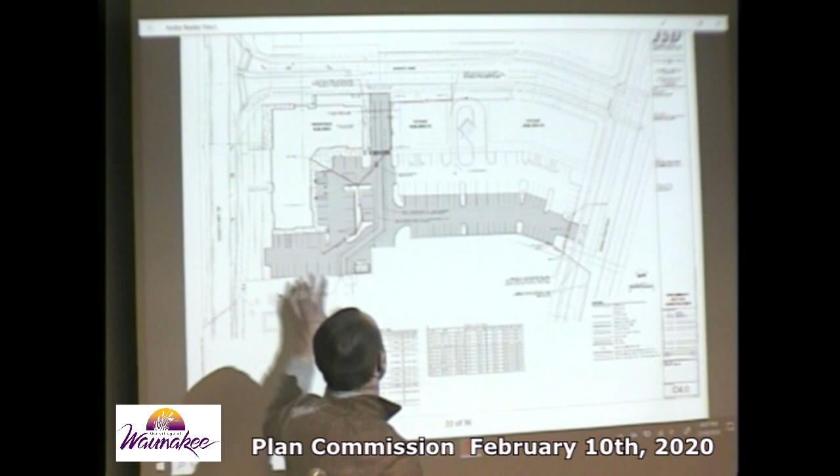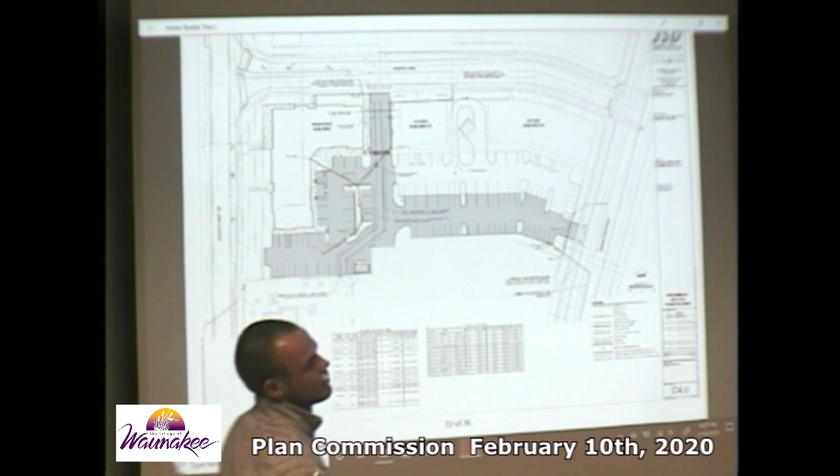Sure, on this parking area, everything is captured in this inlet, routed through, up, over, and out to Sarah Lane. The watershed itself, much of this southern parking lot, is actually projected to head southeast to our regional basin, where this parking lot is going. What we're doing here is trading off a little bit of that area, so this will head northeast, and we're picking up this area to head southeast. So there will be a trade-off here in the future, which was detailed in our stormwater management plan.

So what about the stormwater on those residential lots? Will that flow north or will it flow south? Where does it do it now? Where is it currently, what direction does it flow? I believe we're heading to the southeast with those lots, but I'd have to pull up a larger grading plan and look at that.

Okay, I think maybe you could answer that offline or later in the meeting. Sure. Okay.

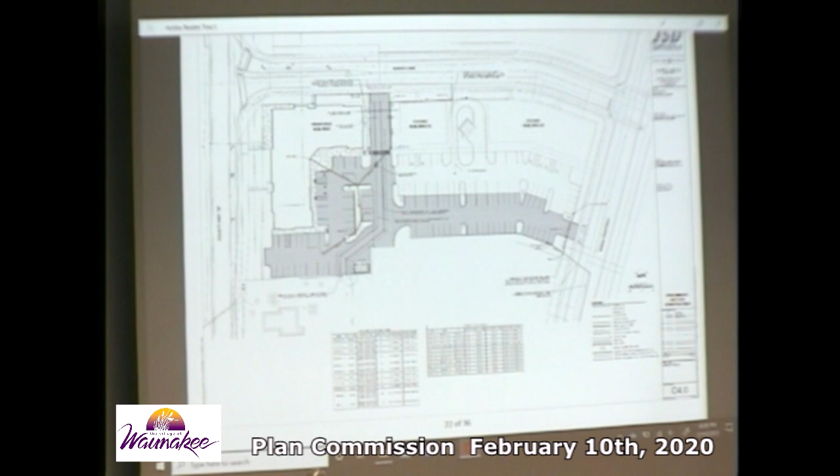My understanding, Josh Wilcox with GBA, we're the architects on the project. I don't know if everybody in their packet has the elevations or the renderings. I don't believe it's going to be part of this, so we have the option to either hand out some hard copies, or I don't know if we're permitted to put the elevations on the screen in terms of what the actual process here is.

She might, do you have a flash drive? Yes, we do, I have them previously, possibly. If you get us a flash drive, we can put them up.

There we go. All right, so right now we're looking at building 1, and that is the only building that we have developed elevations and a design for.

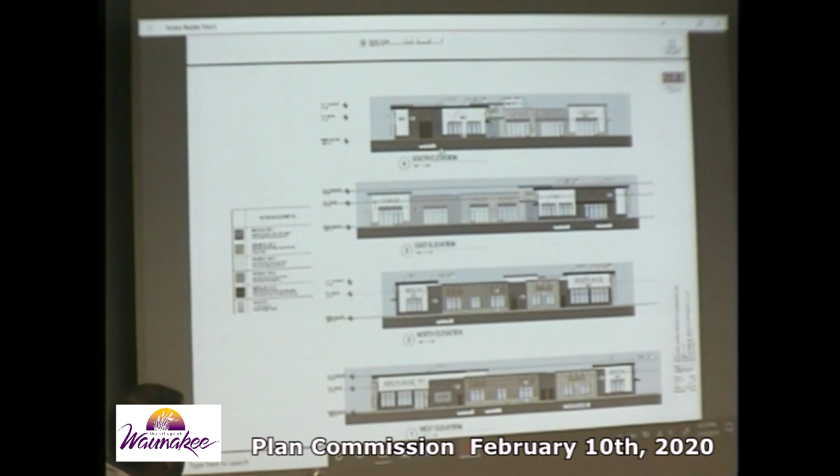Overall, the theme here is to take these buildings and pull them up to the corner of the lots to create a little bit more of an urban edge. Between the setbacks that are required and the different utility easements, we could only go so far. But by pulling all of the buildings up, not just building A, we create more of an urban edge, activate that corner, create a little bit more excitement there, and also bring the parking internal.

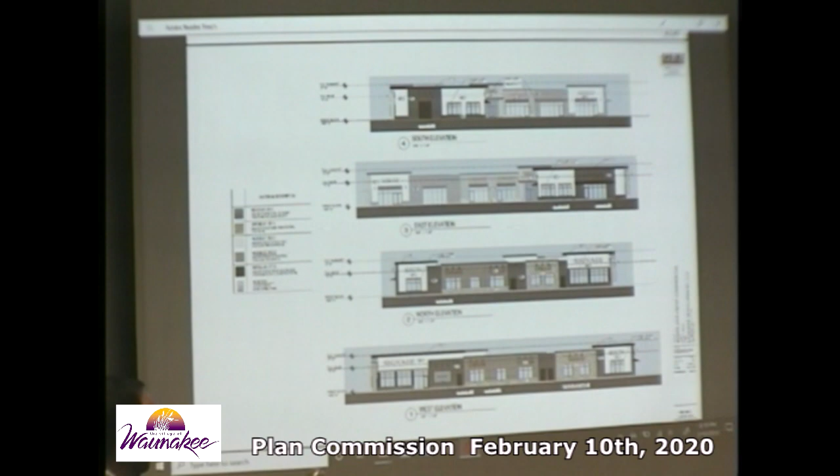So when you're going by on Q or Sarah, coming from Hy-Vee, you're going to be looking at more activated storefronts and less at a parking lot. That's the overall concept, and that's where we started with building 1 with that L-shaped design. Buildings B and C will evolve, but that concept is there, again creating that activated storefront looking out.

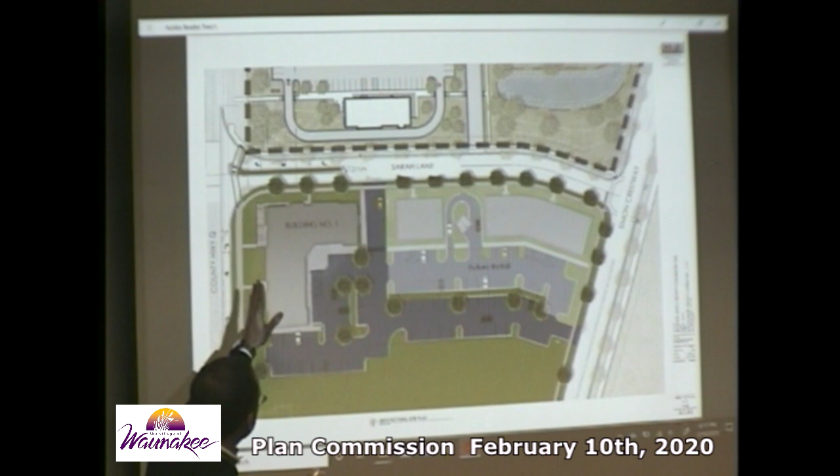While the actual pedestrian entrances will be on the inside of the building, the facade itself has been activated on all four sides with high-quality materials, massing, and different roof lines throughout the facade to ground the materials in there.

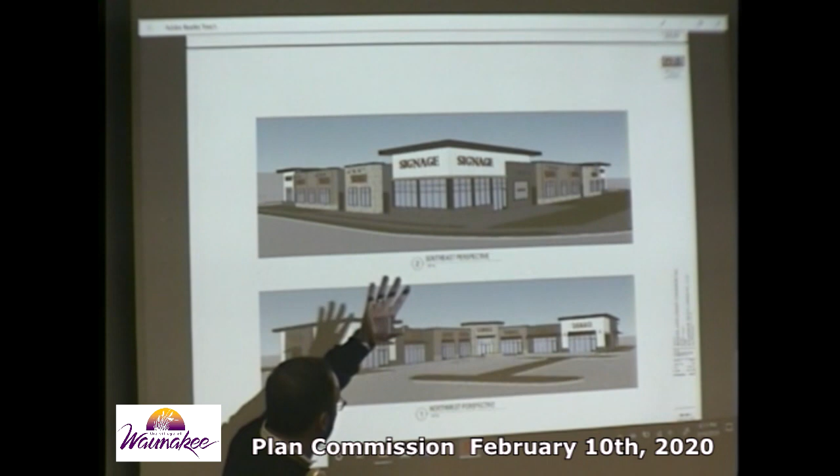Let's go to the rendering shots. We started with the focal point on the corner, and that's where the design evolved from. So that has the highest roof line, the most activation with glass looking in at what would be the corner tenant. As Jeff mentioned, there's five or six tenant spaces in there. That would be kind of the anchor tenant, so to speak, with an outdoor patio space.

So what we've done is we've taken the facade, raised that up, and then dropped the massing around it. By alternating the massing in and out with different materials, it provided opportunities for signage above for the different tenant spaces, while still allowing for multiple areas for storefront from the outside looking in.

So typical retail, obviously the entrance and all the activations coming from the parking lot. Here we're two-sided to that end. Beyond that, the material palette is pretty simple.

We have essentially three different colors. We have a darker masonry through here that is black. It has some warmer materials in it, giving it a soft matte look. That is complemented with a thin cut stone that you see on some of the other forms.

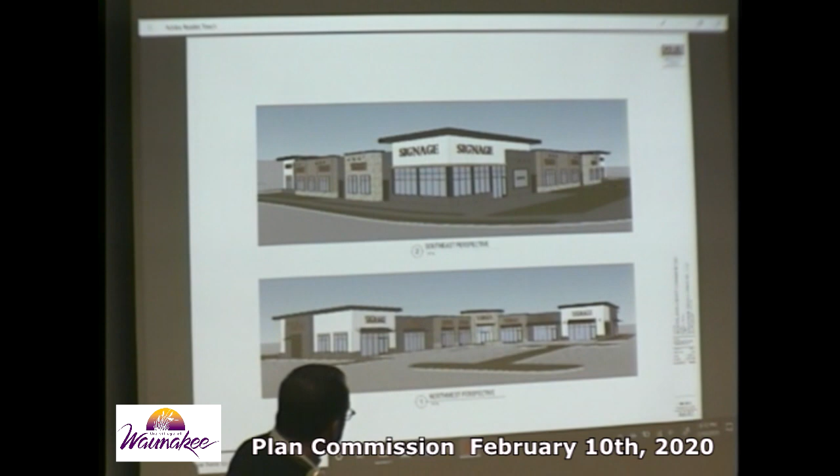Ultimately working to a board and batten, something that's somewhat consistent through this part of the area. That creates some of the higher roof lines through there and brings the brighter white color to it.

Now the white is something that's a little bit unique in this area. We like the idea that it's at the focal points and kind of draws your eye to it while not being overbearing. You don't look at a white colonial style building here. Rather, you're looking at the stone materials and the bricks to ground it and make it feel warm and simple.

We've gone through and been consistent with the glazing throughout, getting as tall a glazing as possible, with darker window frames. We're looking at black window frames, kind of a classic treatment with the white color and with the stone through there. That's consistent throughout, like I said.

And then introducing some awnings and different architectural treatments to add a little depth and texture to the building. With that, some of the roof lines also are extended up to hide as much of the rooftop units as possible from the primary views.

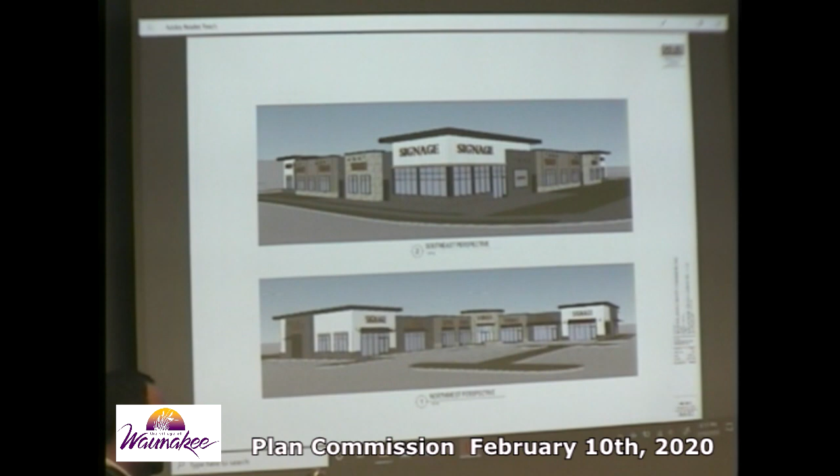So we're trying to do that in lieu of doing large rooftop screening, something that you can see from a distance. That way it's integrated into the architectural form as opposed to an add-on feature throughout there.

Our max building height's gonna be around 21 feet. That may go up or down depending on what we can do to screen those rooftop units. I know it's one of the comments that came back from staff, to make sure that those are screened, and again, we're trying to integrate that into the architecture as much as possible.

So with that, I think it gives you a good overview of what we're looking at here architecturally. Certainly we can talk a little bit about signage and some of the other details on there if you like, but typically those are done by third parties.

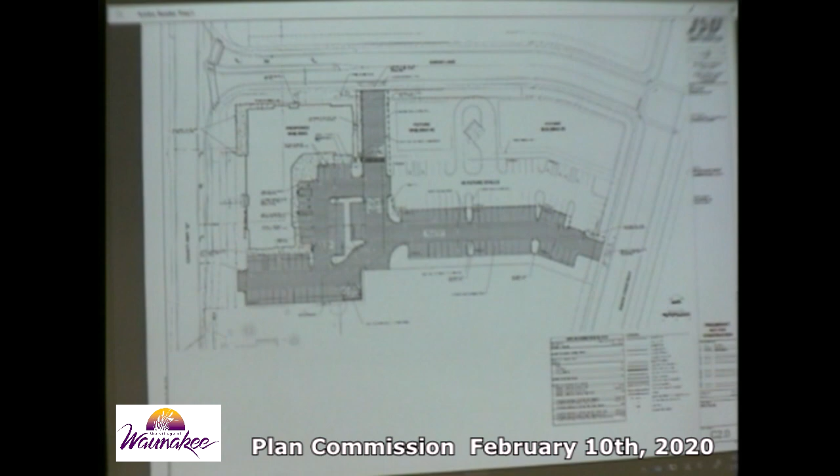One question I have for you, and it's a bit of a deferral, is if the village engineer, by the ordinance, determines this to be a minor addition, then it stops here at the Plan Commission, which I would lean towards unless there's opposition from the Plan Commission. Otherwise we would need to go to the village board and get an amendment to the GDP. So I'd like some direction from the Plan Commission, if you would concur, unless there's some objection to me calling this a minor addition to the general development plan.

Yeah, I would say, even if it goes to the village board, there's flexibility within the existing general development plan where the village board could reach a conclusion that the 78% is fine, and you don't actually have to amend the GDP.

One thing, depending on what your rationale is - I understand the developer is tying this back in with Lot 1, the Hy-Vee lot. If that's critical for your analysis, the only caution is that we've already approved an SIP for the Hy-Vee lot, and there's always the possibility they may need to come back to amend its SIP, possibly needing to increase the impervious surface area on their lot while still staying under the 70% mark.

I just don't want your decision tonight on Lot 2 to potentially negatively impact the flexibility on Lot 1 moving forward. I think that's part of a discussion we would need to have, and we'd probably need to involve Hy-Vee in that. At the staff level, we're not proposing that we tie those two properties together, but if you think they should be tied, we need further discussions on it.

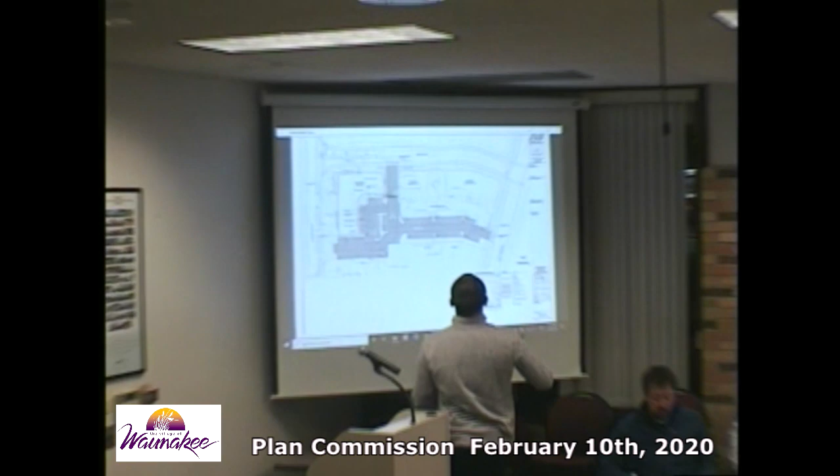It says here the applicant should add a stormwater collection inlet in the east parking lot where water appears to be trapped by the proposed tree island. Gotcha, yeah, I can just point to that quick. So this parking lot here will drain across, and right here we just have a curb opening on the backside of these islands, and that water will sheet flow through that curb, get to an inlet, and down it goes.

And I'm assuming that the pieces that are going to remain undeveloped at this point in time will stay as grass or whatever, so that there's no stormwater issues there.

What about lighting on the building? Do they have to get a certain approval on the lighting? There were renderings here of the architecture. They showed significant lighting on the outside, on Q and Sarah. There seemed to be significant lighting there. What about in the lot itself, or on the inside of the parking lot, not inside the building itself?

Right, we do have lights proposed within a few of the islands. We do have a photometric plan, if you wanted to scroll to that, and I can speak to those. The photometric plan takes into account the parking lot pole lighting, but does not take into account any lighting on the building, from my understanding.

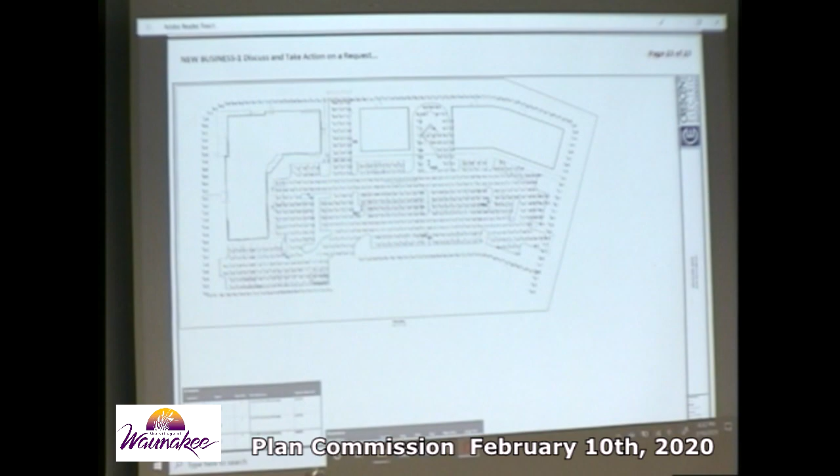So we have accent lighting on Q and Sarah Lane, those kind of bell fixtures that would highlight signable areas. And then on the internal side, we'd have some building mounted lights for decoration, and some lighting in that center area to highlight the entrance for the tenant in the corner there.

Does that have to go to staff for approval? Yeah, that's part of the conditions that Kent included, that a catalog cut should be provided to confirm all lighting proposed has full cutoff shields and projects downward. That's something we always check as part of the final, before we issue a building permit. So all lighting would have to have cutoff shields and project downward, as Kent suggests. Same with the signage? Same as the signage, yeah.

Good. Ryan? So I don't have any questions. Joe?

As far as signage goes, how are we within whatever limits on this? Just from the visuals, it kind of looked like a little excessive. We don't have a signage plan, that'll have to come back here.

That's fine. Chris? Can I get a little clarity on the parking? So it sounds like the 92 stalls that's in here right now is excessive for this phase of the project, but going forward, it sounds like it's not gonna be enough, but combined it is? Is that when they start hitting the next phases of this, are we looking at combined for the whole lot?

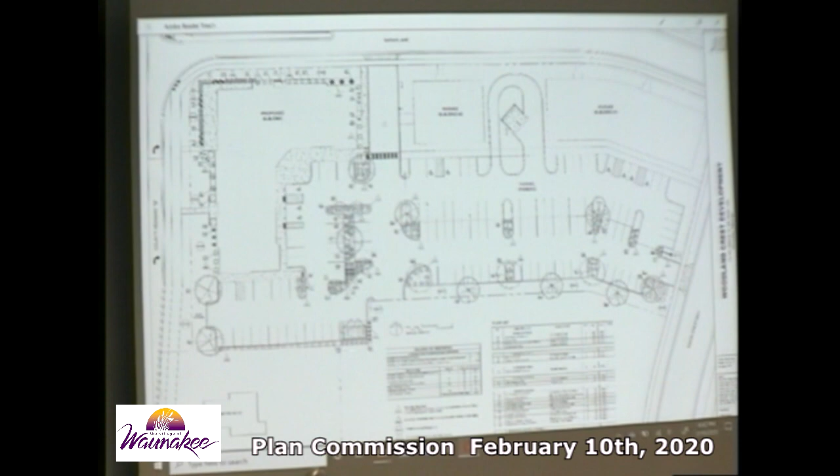What is the largest island there that separates the two phases? Is that just a standalone island, or is it retaining water there? The island directly there, that's right, yes. That's not going to retain any water—there's a stormwater pipe that runs underneath it, and then there's landscaping on top.

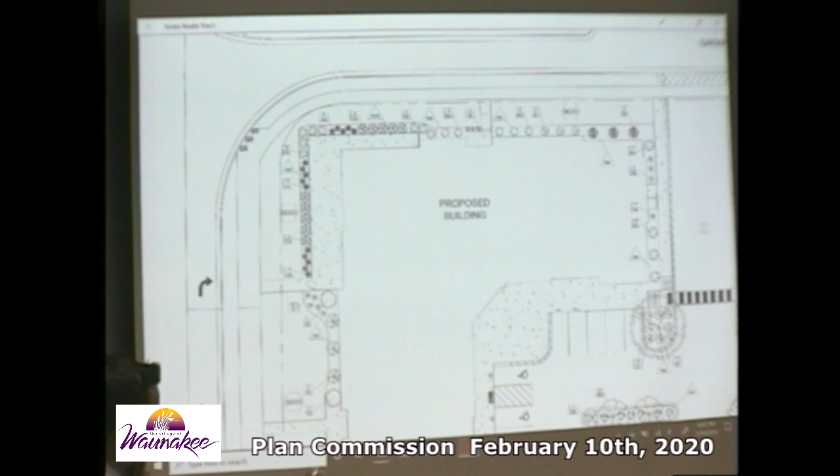And you keep mentioning the corner patio, probably a restaurant—you'll have big trucks or semis, beverage trucks coming in. Where do they unload while people are parking? How does that work? That's a good question. With this type of layout, the downside is deliveries for any tenant. I've got 4 or 5 buildings like this, and most of those deliveries come early in the morning when there's really little activity here—most tenants won't open until 9 or later in this kind of scenario. For a restaurant in that corner, as an example, you'll see trucks come into the internal parking lot and come through the front doors with their material.

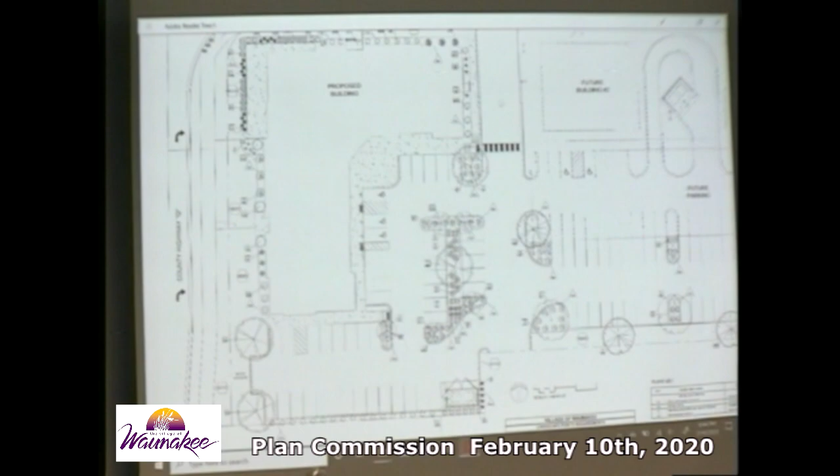My biggest concern—you really know, I think—is just the flow, and I heard you where the water's going to go. My concern though is south—is it always going to flow down into the other zones, and are the capacities sufficient? I'll leave it to the expert engineers to tell me that, but that's just my concern when you have very little to stop it.

I don't think I got an answer yet, so maybe we can circle back to that question—I think he's had time to figure out the answer. How does the stormwater interact between this property and the property to the south? I think we need to understand that. Sure, all of our site stormwater is contained on our site, exiting either to the southeast to a regional basin or heading up to the northwest, so we're really not affecting the two parcels to the south or Outlot 1. Outside of minimal lawn area on the south property line that may drain onto Outlot 1, everything's contained on our site.

So maybe where I'm going with it is the parkway to the very south—if we have so much massing of parking and pavement, that coming at that speed, if that flow is heavy, everything flows south. Westport talks to us all the time about our water coming their direction. I just don't want this to be an overabundance of that.

From an engineering standpoint, are we good with that right now? That's what I'm asking—has that been flagged? I think everything looks great, but I just want to make sure we don't have a water issue. Those regional detention basins are designed to dissipate energy and take the heat out of that water, and also then go to a separate system, infiltrate as much as we can, and outflow in a very large storm event. It's always our goal as engineers to recharge the groundwater, infiltrate what we can, and take the heat out of that water, because the parking lot in the summer is hot. So, we have expert engineers, not myself, that have modeled this entire system, and it's been approved at the plat level with staff's reviews, so we are confident with this design.

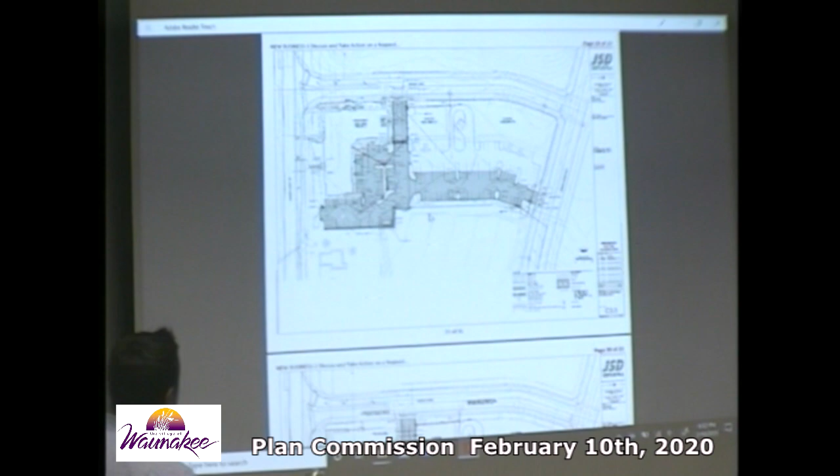On the south end of the first building, we were showing a sidewalk along the whole south end, but it doesn't connect to anything. So what we did was take that sidewalk out, but left an area for loading for that tenant. That allowed us to shift the parking lot north to achieve the 5-foot requirement off the property line.

What we proposed may have sounded odd, but our thought was that when this property develops, there's probably going to be another strip added that will get you another 6 feet. We can't guarantee that happens, but the initial thought was you'd have an island separating those two properties. We understand the point made by staff though, and this is an easy way to achieve that now.

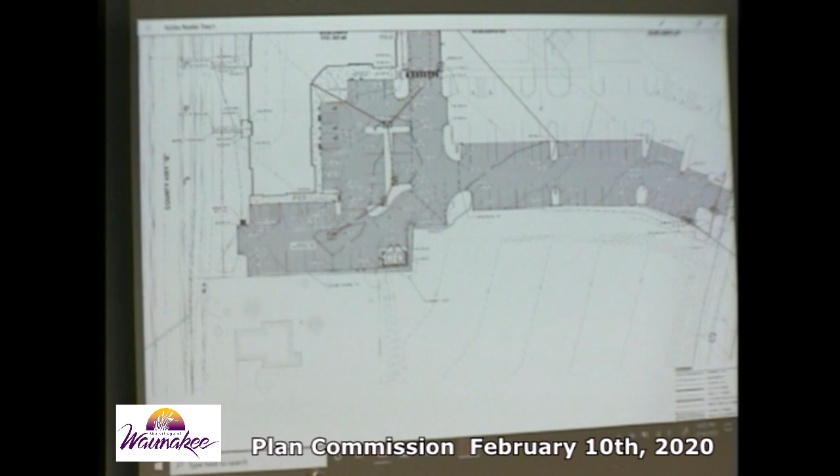Any other questions? Okay, Kevin, do you have any other comments before we wrap?

I would add some conditions after number 9. Number 10 would be no occupancy until the sewer and water improvements are completed. Number 11, unless I hear objection, the engineer would determine this is a minor amendment and only needs plan commission approval. Number 12, additional landscaping be added to compensate for the 78% coverage. And then number 13 is for me to prepare a statement regarding the 78% and the justification for it.

So I'll just ask about the landscaping one, Kevin—who's going to approve that? Is that coming back here? That would generally be Jason or Ed. Okay, so they would be the ones to approve it. The way I wrote it gives some pretty good discretion in terms of what's being added. If you want to put some parameters on there, you could. I understand your point, and we'll follow through with it.

Does number 9 include the concern about truck space for the trash there? Yeah, that was included.